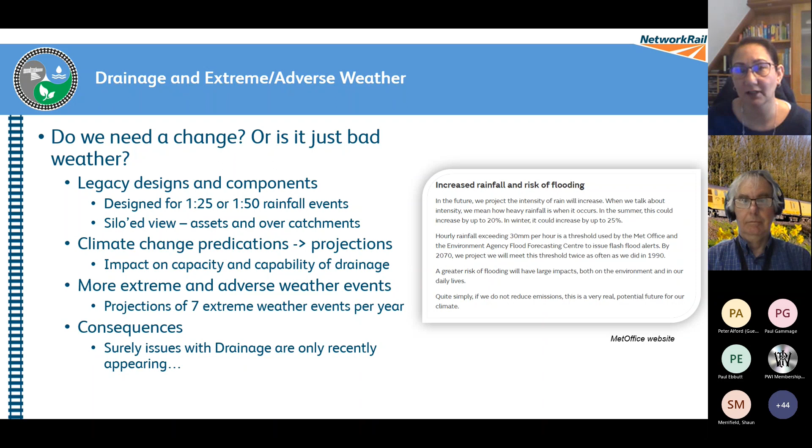So that's not so bad. Maybe it's okay. Maybe we can cope with what we've got with drainage. And it's only just a recent thing that our drainage systems are being challenged because of climate change, or whatever reasons we want to align to that. So I did a little bit of a review back, and this is on incidents. These are incidents where RAIB or the ORR have investigated. And we went back to 2000. There were some in 1940, but I'll get to that one in a second.

So what we really saw was going back to about the year 2000, so we're talking 23 years ago, every 2 years or so a derailment related incident that has a connection to water or rain, or flooding or washout and earthworks washout due to extreme weather event. And what we're seeing is that that frequency is there, every couple of years. And things are more recently getting worse.

The worst being Carmont, which was the 12th of August 2020, which resulted in a derailment that led to 3 fatalities on a train that had 9 people. So that's something to sort of hold in your mind when you're looking at numbers there.

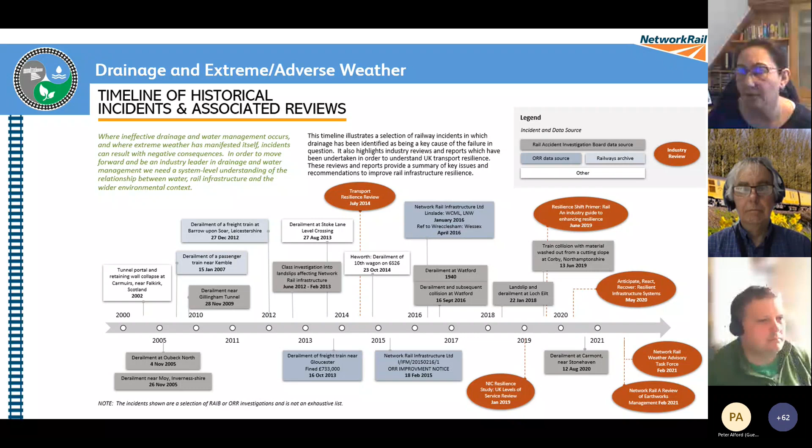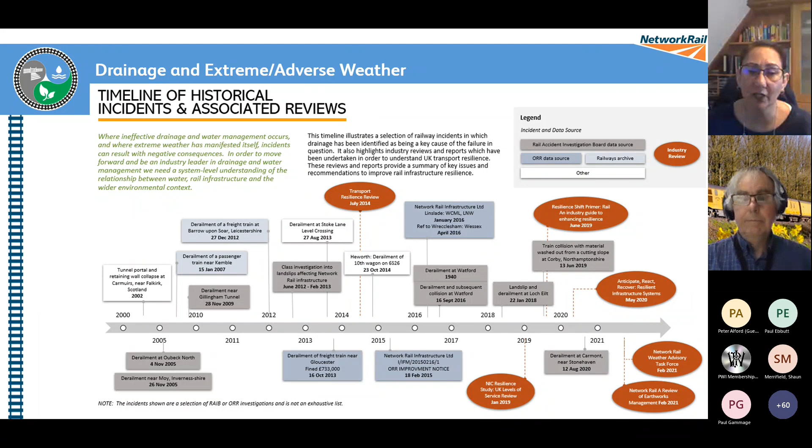So these incidents that have happened, and the recommendations and the findings that have come up, we looked back and said, is there some commonality? Is there something pointing towards things that we could learn from? And so at the time of creating this little root cause analysis, Carmont is not on this one because at the time it was still under investigation and we were still putting our findings together.

So this was data as of 2021. We looked at the RAIB reports and the ORR reports and tried to summarize as best as we could some of the findings and the relationship of those findings to those incidents. And you see on the green and the blue column an overall start of the incidents, and then we move forward to

Oh, I'm hearing. Oh, sorry, I'm hearing somebody. Can you go? Please be on mute. Thank you.

So what we found are the findings that you see here on the screen, and then we move forward towards saying that there's incorrect assessment, which leads to a lot of issues there. Communications, designs, maintenance. We move forward and say, well, what led to those? Well, basically increased drainage runoff. And maybe structurally the assets were blocked or broken.

And those things lead to the big circle that's got all the numbers at the top, which is basically that the drainage asset system was either not performing or the capacity was exceeded. And because of that capacity or the non-performance of the drainage system, it resulted in either an earthwork failure or it accentuated a track defect. It amplified that track defect, which then led to the incident occurring, the incidents which are specifically listed there on the very left-hand side.

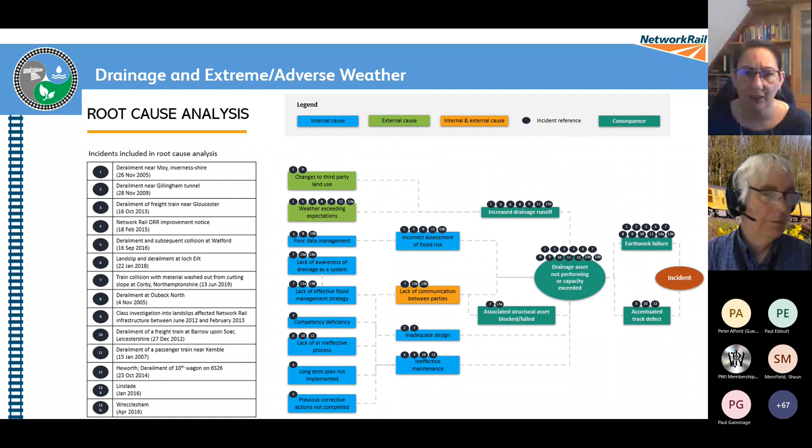What we know is that functioning drainage supports the optimum performance of other assets. If you've got good performing drainage, which is managing the water, basically collecting and conveying the water, you will have optimum performance of your earthworks because they will be stable. You will have optimum performance of track because the formation will be dry. You will be on solid ground. Your structures, I'm talking culverts, tunnels, retaining walls, will have solid ground as well and will not be affected by the forces of water pressure and hydraulic pressure on them.

Signaling, I mean, any sort of mechanical, electrical assets don't really like water, don't like being underwater. And so, again, making sure that we keep the water away from those other assets and keep it flowing because water does flow. We're part of the water cycle. We need to move that water away.

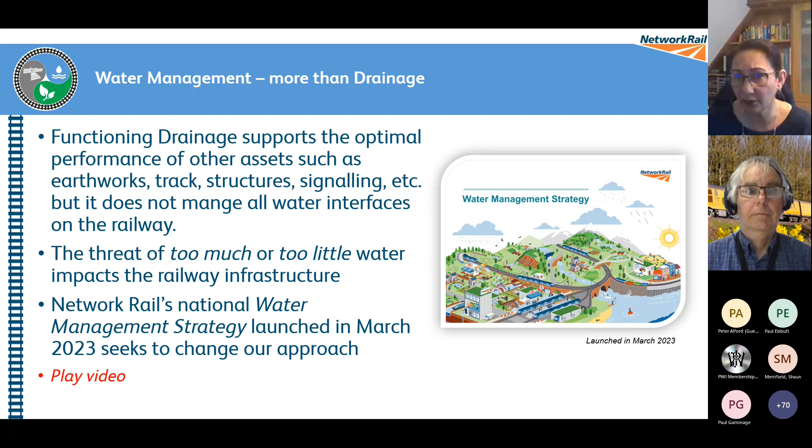So if you bear with me, being a very poor presenter, I'm just going to stop presenting for a moment because I would like to share a video with you to show you a little bit about what we're doing in this space, and I'll start sharing in a second once this is all set up. Share with sound, this should work. Sorry, if I don't talk out loud, it doesn't seem to get in my head.

So you should be able to see a video that I'm about to play, and you should be able to hear the sound.

Introducing Network Rail's water management strategy.

Yes, I got a thumbs up.

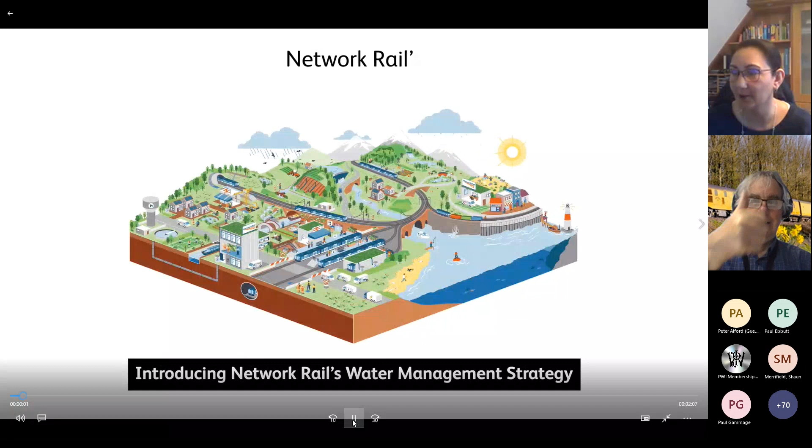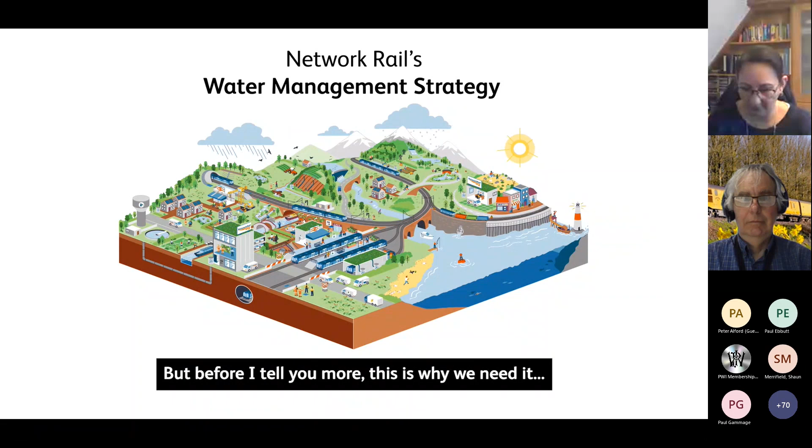This strategy is going to change our approach to water management. But before I tell you more, this is why we need it. Climate change is happening now, making the consequences of extreme and adverse weather a reality for all of us. Flooding and droughts already cost Network Rail millions of pounds a year and are only likely to get worse. From landslips to electrical failures, weather-related incidents affect the safety and performance of the railway, resulting in penalties, delays, poor environmental impacts and a disrupted service for our passengers.

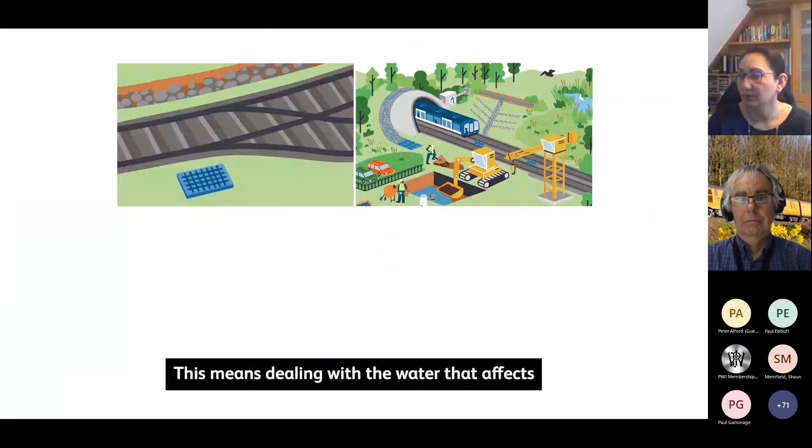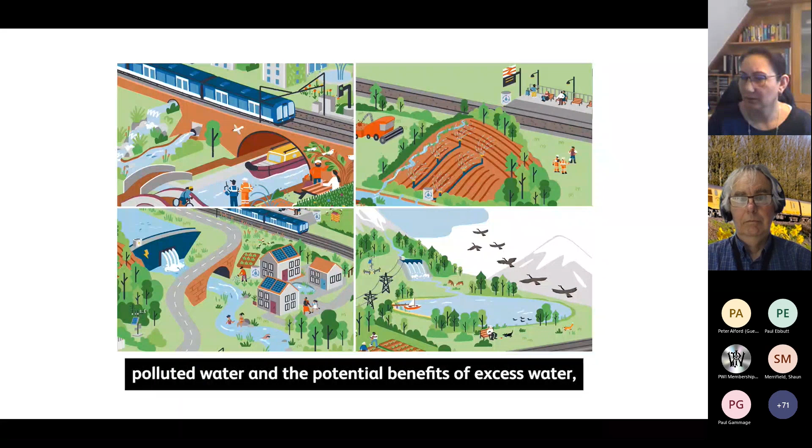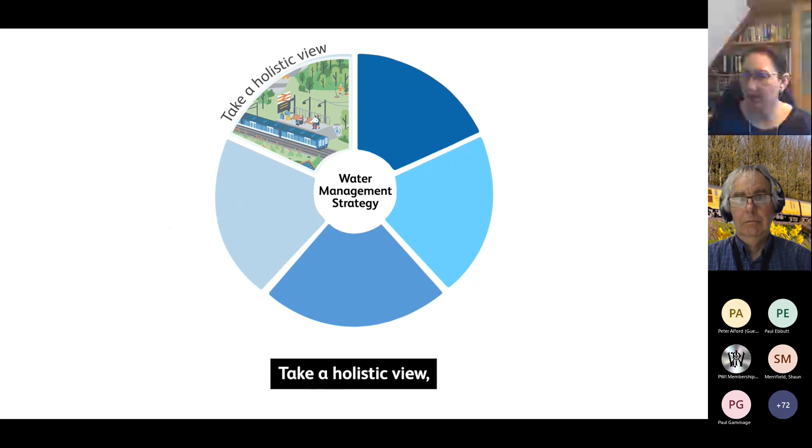But we can improve. Network Rail is committed to running a reliable railway network. To do this in today's world, we need to prioritise water management. This means dealing with the water that affects all of our railway assets. We need to grasp the wider challenges of water scarcity, polluted water, and the potential benefits of excess water, in collaboration with our neighbours. We've developed the water management strategy consisting of 5 principles. These are: take a holistic view, be resilient, use less and recycle, keep it clean, and unlock wider benefits.

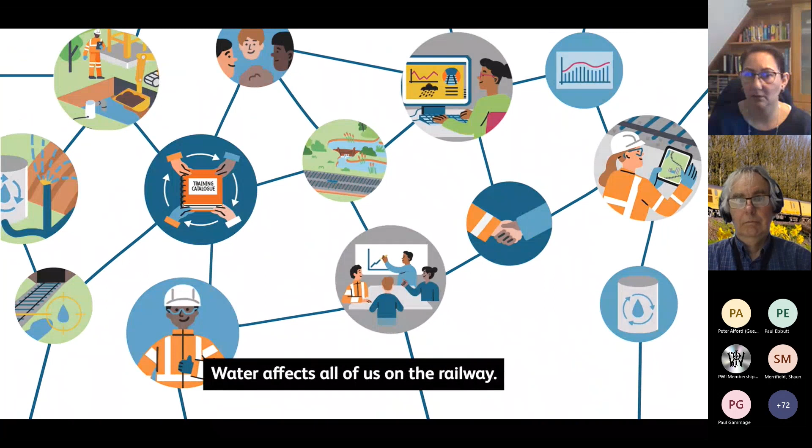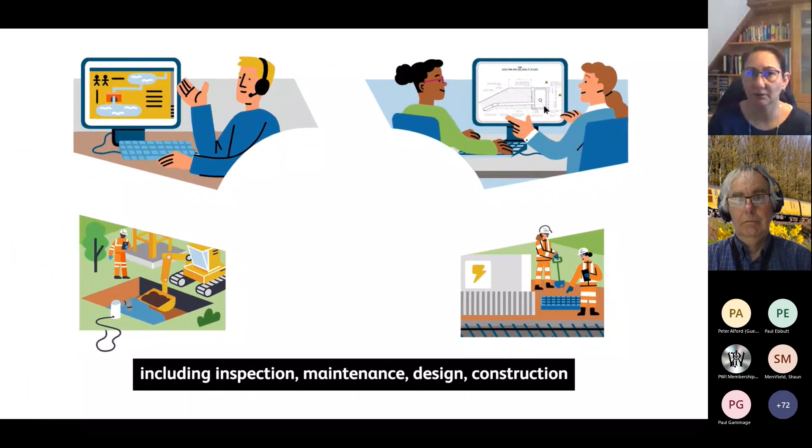We are the first in the transport industry to develop a water management strategy. It's an opportunity for us to demonstrate our proactive leading approach. As the 4th largest landowner in the UK, we can make a profound impact. Water affects all of us on the railway. Every asset group and all life cycle activities, including inspection, maintenance, design, construction, and asset management, have a part to play. We all have a responsibility and we need to start today. So, how do you make a difference? Start by engaging with the water management strategy. Go to the My Connect page for more information.

Great. So for those that aren't Network Rail, that is basically an approach to our water management strategy. It is available. It's only sort of internal at the moment, but we are looking to go forward and go external with it.

So let me go back to my presentation now, and oh goodness me, share screen. This should work. So you should see the presentation again. Hopefully, I'm just looking at Andy for a thumbs up. Slide deck's back up. Yep. Okay, great. Thank you. So for those that don't know me, I've got a sarcastic sense of humor.

So drainage is easy, right? Once you've mastered the complexity of it. And I'm sick of people saying that drainage is just easy. It's a copy and paste, doesn't really need much thought to it. It actually is quite complex in its own right, and it's complex when we do it right. So drainage is a system with multiple components. A drainage system is defined as multiple inflows with one discharge point. You can have multiple systems across one catchment, or you could have one system over many catchments.

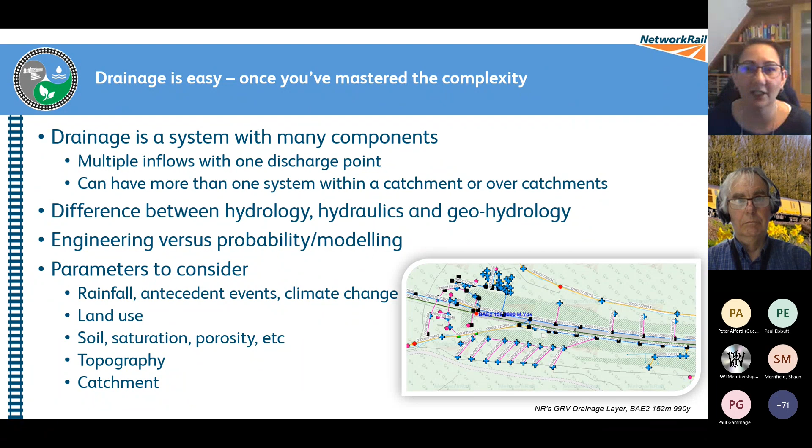So looking at those things, when we look at the engineering side of it, and my apologies for my assumption that the audience are mostly of a technical or engineering background. For those that don't know, our go-to, our Bible for hydraulics is the Manning's equation. If you've got a pipe of a certain diameter and a certain material, plastic, corrugated pipe of a certain diameter, you can use Manning's equation to calculate what its maximum discharge rate is, how much water can flow through that pipe.

You flick it around the other way. If you have how much water is coming towards you, you can back calculate then to find the area, your wetted perimeter, and that's where you size the pipe depending on the demand put onto your system. So we use quite a few industry standard products, British standards when it comes to pipes and channels. We use highways. We have our own standard detail drawings that we use based on our knowledge and the best experience that we have at the time.

We've got a lot of experience in track drainage, and we have a lot of experience in earthwork drainage, but not together. We have them separate, and there is, believe it or not, a different approach to both at the moment within Network Rail, even when it comes to our engineering of those two types of drainage. I'm not going to call them drainage systems, because drainage is a system and it includes track and earthworks drainage. But where they're located, track versus earthworks. There's a lot of experience in the ways that we have been doing things. I'm not saying they're necessarily correct.

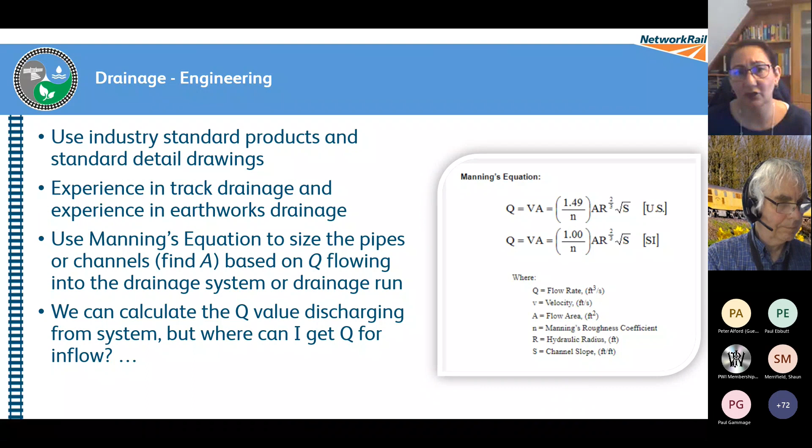So up until 2018, when we redid the drainage design standards, the drainage design standards previous to 2018 didn't really talk about catchments. It sort of lightly said you could use local knowledge and what you know of the area. When we redid the drainage design standard, we said, no, you need to understand the catchment. You need to use catchment data. You need to use modeling. And the recommendations at the time were the Flood Estimation Handbook.

But there are other models that you could use to understand, based on the catchment size, how much water is coming at you. So seems easy enough, but there's a cost to it as well. And that cost, when you're doing simple drainage designs, is probably one that we don't want to bear. We didn't think that it was worth it. And so we used our past experience and said, this is the designs that we need to put in. However, in a post-Carmont world, that is no longer acceptable.

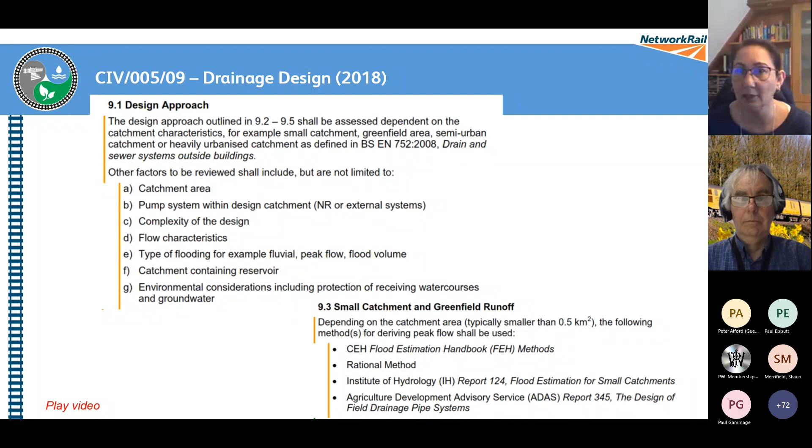And so one of the things that we've done to deal with understanding how much water is coming at us, and now I'm talking about normal rainfall, put on top of that your extreme and adverse weather rainfall, how do we understand how much water is coming towards us so we know how actually to design our systems? And so again, if you wouldn't mind bearing with me while I switch to another video, so that I can show you what we've done in the space of catchments.

I hope that you find this very interesting. I personally do too. I'm just a geek for water. Let me share my screen again.

Include sound, include sound. There we go. You should now hopefully see a video that's about to start playing. Only 2 minutes. Thanks, Andy.

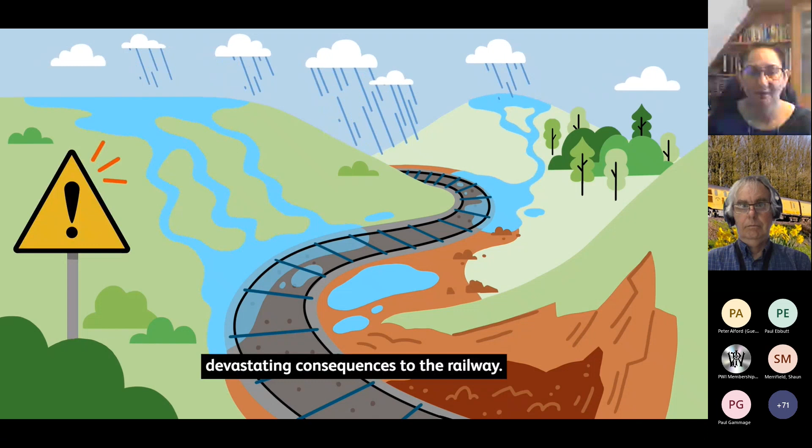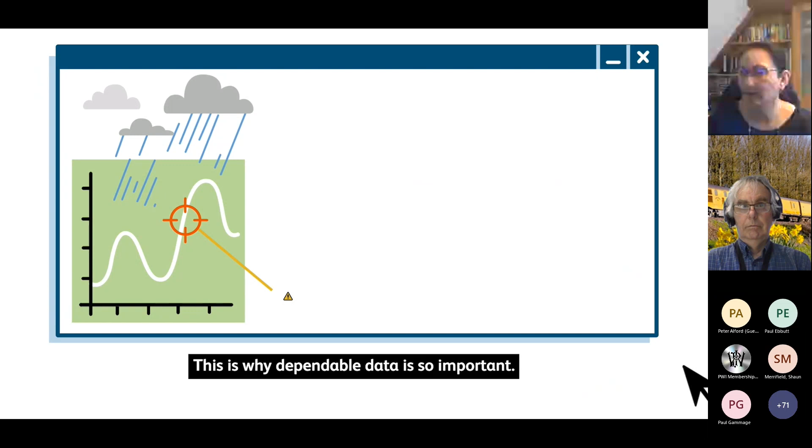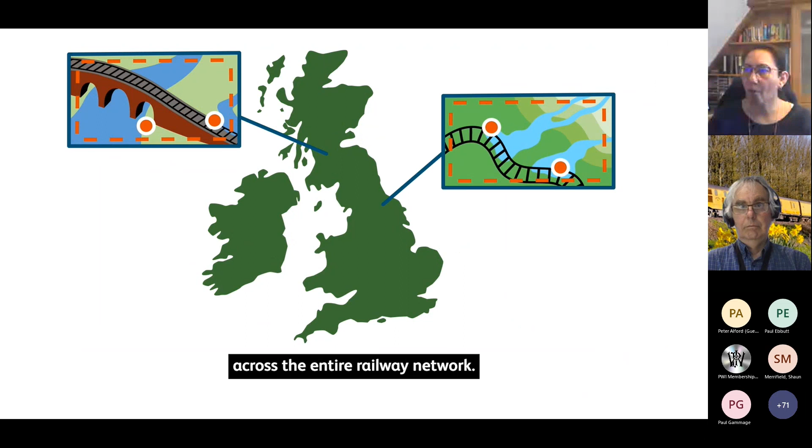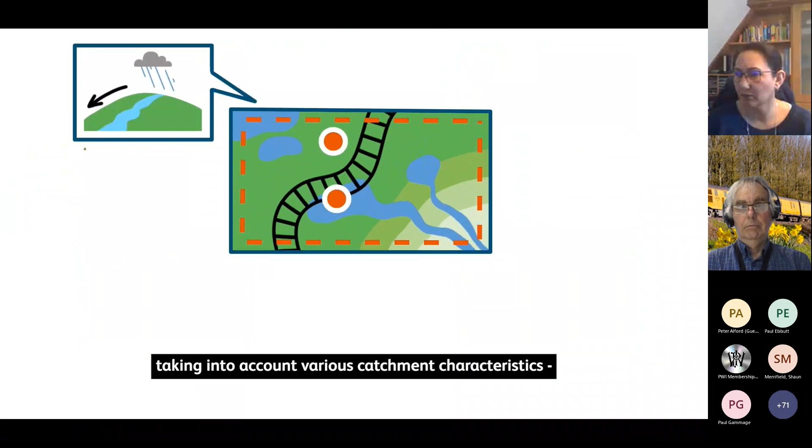Surface water runoff has potentially devastating consequences to the railway. At Network Rail, we need to manage this threat across our infrastructure to ensure we operate a safe and reliable service. This is why dependable data is so important. It helps us to make the right decisions to protect passengers. Now, for the first time ever, we have a data set that maps rainfall catchments across the entire railway network. It's taken more than a year to produce and encompasses more than 100,000 individual catchments, taking into account various catchment characteristics, from catchment area to soil type, in order to understand potential surface water runoff.

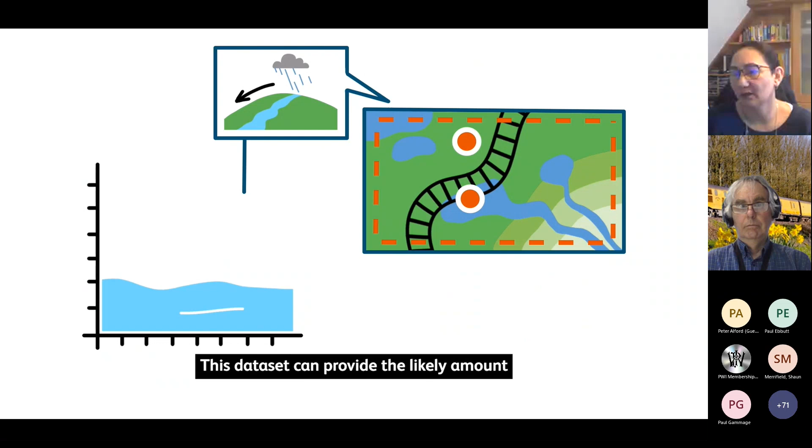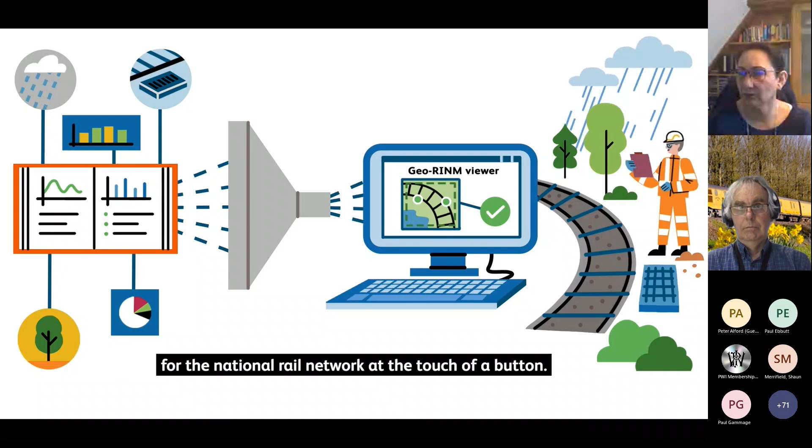This dataset can provide the likely amount of surface water runoff flowing towards the railway from each catchment for a given rainfall event. It relies upon the Flood Estimation Handbook, an industry-standard statistical model developed to understand surface water runoff peak flows from UK catchments. While the methodologies used aren't new in themselves, this is the first time we've been able to access this information for the national rail network at the touch of a button. The dataset is available as a map layer in Geo-RINM Viewer. A water threat index derived from the Flood Estimation Handbook model and other critical attributes such as crop cover and catchment slope provides a colour-coded ranking for each catchment.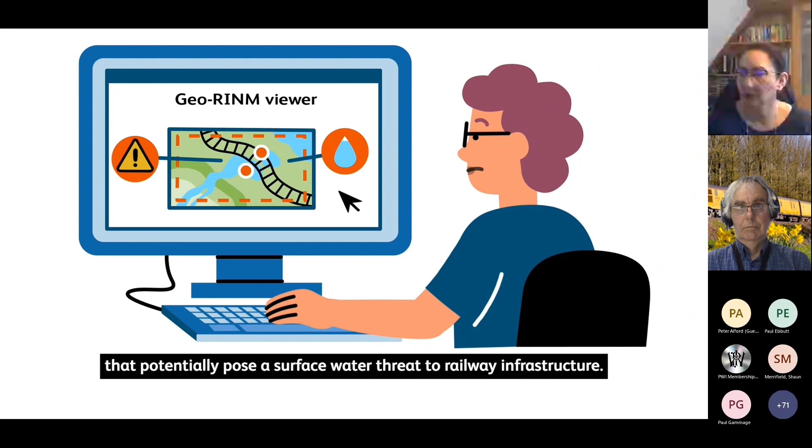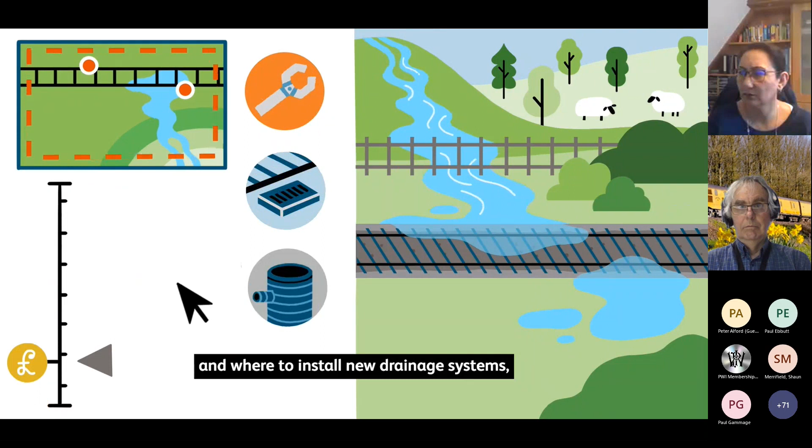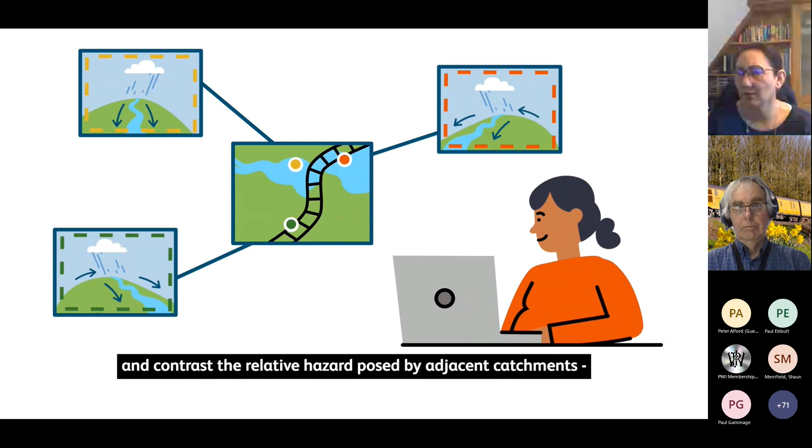At a glance, the user can understand the catchments that potentially pose a surface water threat to railway infrastructure. This helps asset engineers swiftly decide which assets need improvement first and where to install new drainage systems, making budget allocation easier and enabling rapid comparative assessments of which catchments are potentially more troublesome. Now it's possible to view a section of track online and contrast the relative hazard posed by adjacent catchments and how these compare with other catchments across the network. The dataset also provides a great starting point for more advanced analysis, assisting asset management teams and designers in making informed decisions and facilitating good engineering judgment when developing new capital schemes.

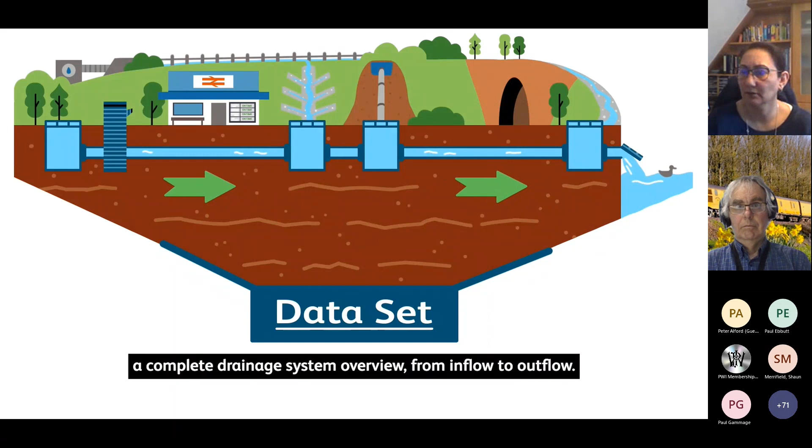In addition, the dataset is also being used to build new asset management tools currently under development, such as the Streams tool. When used in conjunction with programs such as this, the dataset has the potential to help provide a complete drainage system overview from inflow to outflow. This allows engineers to understand the current and future ability of drainage systems to protect the railway in the years ahead.

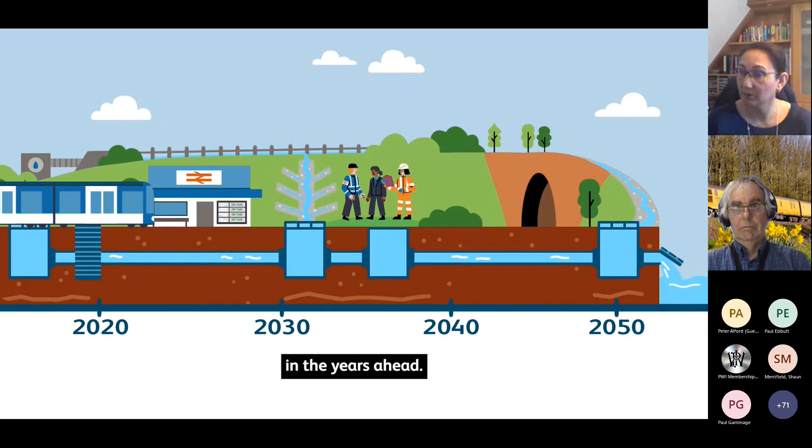Just let that finish. Okay, back to the presentation. So when I mentioned that catchments are key, they are super key. They are key. Oh goodness me. Share. It would help if I shared.

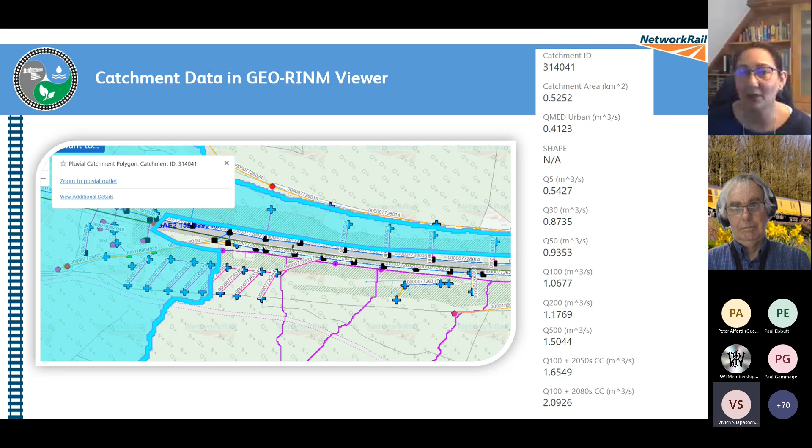I can't hear you, but how about I ask you, anybody want to hazard a guess why this catchment is the weird shape that it is, and what particularly might be of interest in this area to lead to a catchment of this sort of shape and size? I won't say anything. I'll do it in the Q&A session just to give you a little bit of a brain tease while I continue to talk.

So a purple lined catchment is water that is flowing towards the railway, and these are pluvial catchments. The way that I think of it: there's pluvial and there's fluvial. Pluvial, rainfall creates ponds. Ponds starts with a P, right? So does pluvial. The other type is fluvial, and those are shown here in sort of this mustard color.

Fluvial is river flows, and it flows towards natural water courses. So I think of rivers flowing, starts with an F. Fluvial, flows like the rivers. Pluvial, ponds, because of rainfall. So that's the way to think about it. So purple coming towards us on the railway, your pluvial, and then the orange going away.

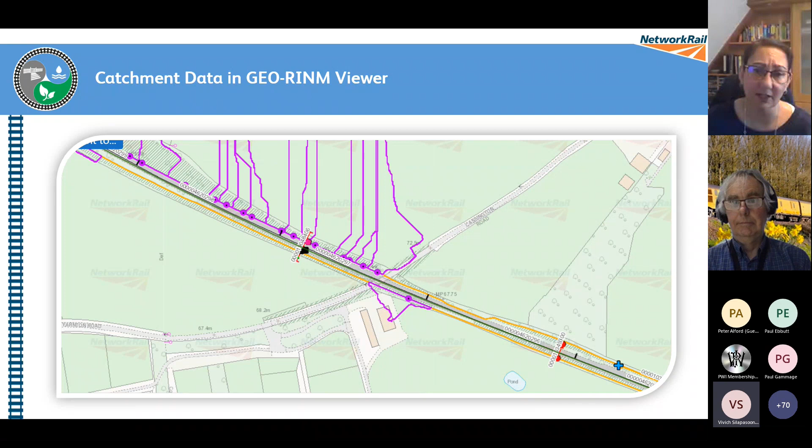Yes, Network Rail and drainage are doing a lot of work in this space, but this is a bigger issue. Water and water management is a bigger issue, and extreme and adverse weather is more than just drainage. So one of the things that we are looking at is catchment communities. If we're being flooded and we're in a catchment, there are others that are getting flooded that are also in that catchment. And they could be highways, they could be councils, they could be water companies.

And so we're starting to talk to the other larger organizations and saying, where are you having your water problems, and where are we having water problems? Let's come up with solutions that support both. And that means joint funding, partnership programs or projects. The other thing that's really been out there with looking at environment and sustainability are blue-green infrastructures and designs, where you use vegetation to support managing the water that's coming towards the railway.

So if we can plant trees outside of the railway, that will pick up some of that surface runoff, or we can create natural berms, and that would divert the water or hold it in or flow it in a different way. That's much cheaper than us digging up the railway and putting in piped systems. So blue-green infrastructure is really a big thing that is coming, and we're being pushed a lot for that. It supports carbon reduction, and it supports more green, sustainable solutions.